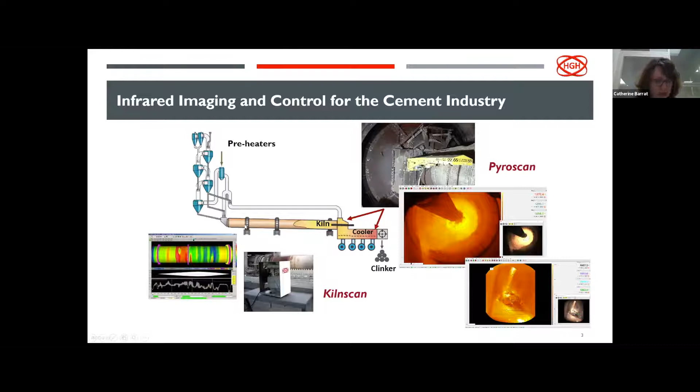What is the principle of the kiln shell scanner for rotary kiln shell temperature monitoring? A kiln shell scanner is a line scanner measuring the temperature over one line along the kiln shell. And as the kiln is rotating, we obtain a full temperature image of the kiln shell, taking into account that the scanning speed is 25 Hertz, meaning that this line scanner measures one line 25 times per second. So using the kiln rotation, we obtain a temperature map of the kiln shell.

The angle of sight of the scanner is at least 90 degrees up to 140 degrees. Using this method, we are able to see the temperature of the kiln shell. This allows the operators to make the maintenance easier because it detects hot spots and measures brick and coating thicknesses.

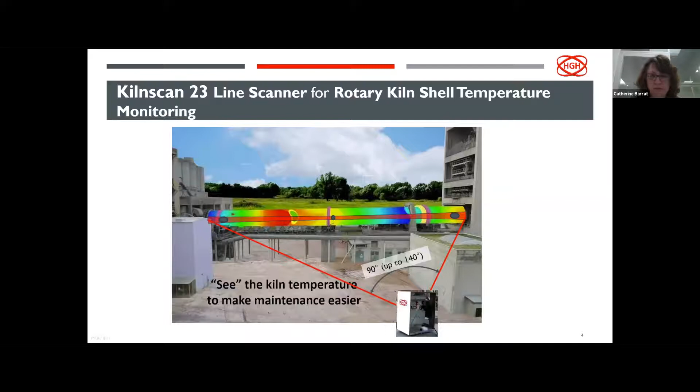The benefits of the Kilnscan 23 line scanner are listed here. It ensures a long-term kiln shell integrity by a 24-hour, 7 days a week, real-time surveillance with alarms on critical parameters, with accurate and reliable measurements on temperature, thanks to its high resolution and its accurate temperature measurement resolution.

It enables accurate maintenance scheduling through the monitoring of the evolution of the refractory status and the shell distortion, by anticipating failures with preventive action and by minimizing downtime and optimizing maintenance frequency. The system is easily taken up by maintenance operators through its user-friendly software interface with visual results and intuitive parameter settings, and it is easily integrated into the control room and plant DCS.

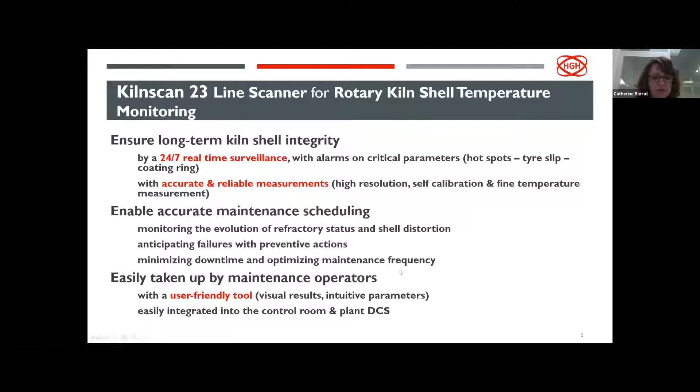Going through the numerous installations we did all over the world, we faced multiple imaging challenges due to complex plant configurations. Among these complex configurations, the most frequent cases are illustrated here. On the left, the case of very long kiln for wet process: how to cover such long kiln.

The case of kiln located inside a building with a short, limited free distance to locate the scanner, and, which is actually maybe the most frequent case of challenging configurations, the kiln masked by posts and supports all along the kiln shell system plant. So this presentation is going to show you that our Kilnscan system remains well adapted even in those complex configurations.

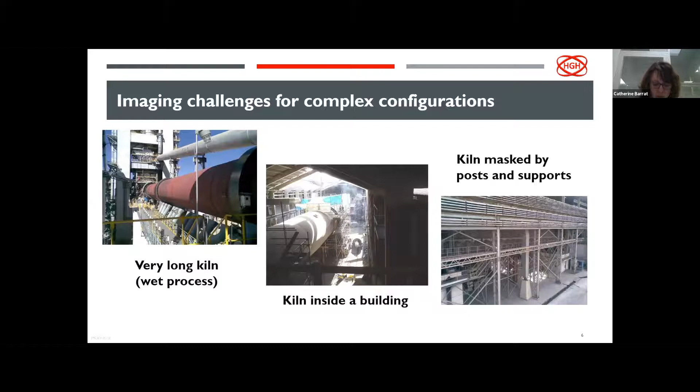The first configuration regards the long kilns configuration. So for the long kilns, we have the possibility to integrate into our system two scanners located side by side and aiming at distinct portions of the kiln shell with an overlap, of course, of about 3 to 4 meters to ensure seamless temperature measurement.

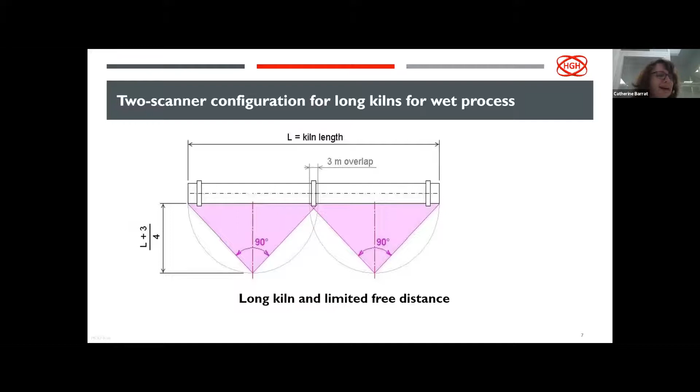In that case, the kiln scanners are located approximately at a distance of the length of the kiln divided by 4. And this is, for instance, a typical configuration with two 90-degree field of view line scanners. There is a picture of such an application here in this plant.

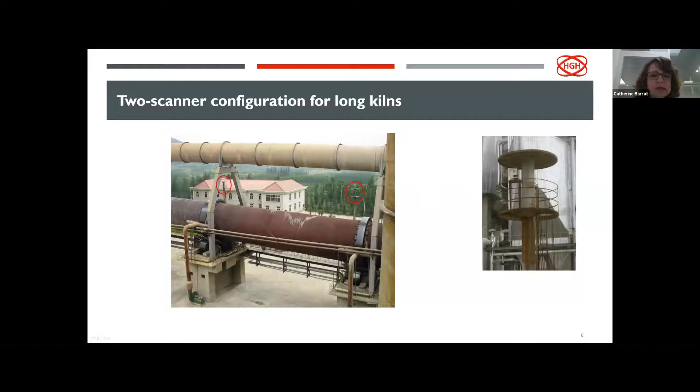The two scanners are located at the top of a mast and they each aim at two distinct portions of the kiln shell, and the two images from the kiln shells are combined to create the complete kiln shell temperature monitoring.

Another challenging case is when the free distance between the line scanner and the kiln shell is limited. In that case, we use our 140-degree field of view option so that the distance between the scanner and the kiln shell can be very short.

As an example, for a 60-meter length kiln inside a building with a distance to walls less than 4 meters, we can integrate three scanners side by side, each of the scanners aiming at 1/3 of the kiln shell. The case where such a configuration is installed is frequently when kilns are integrated into a building.

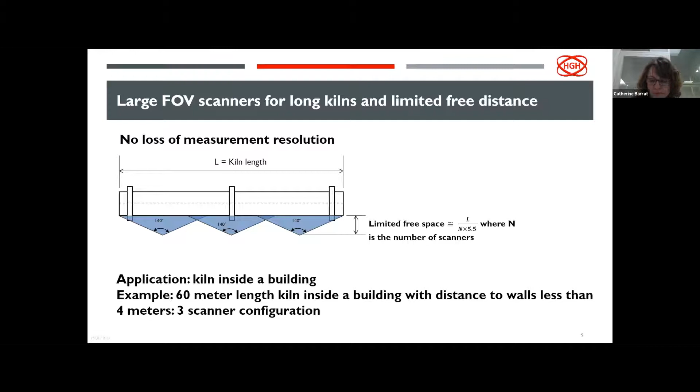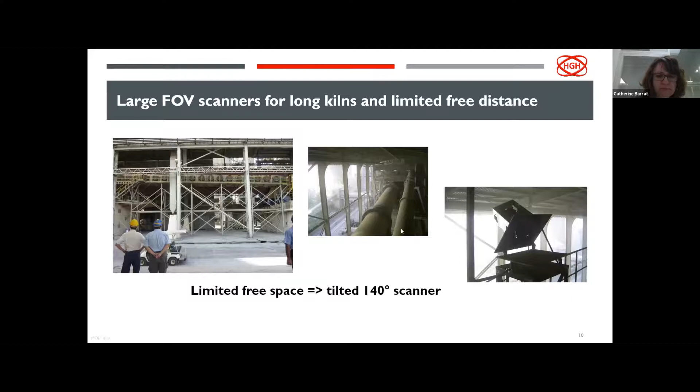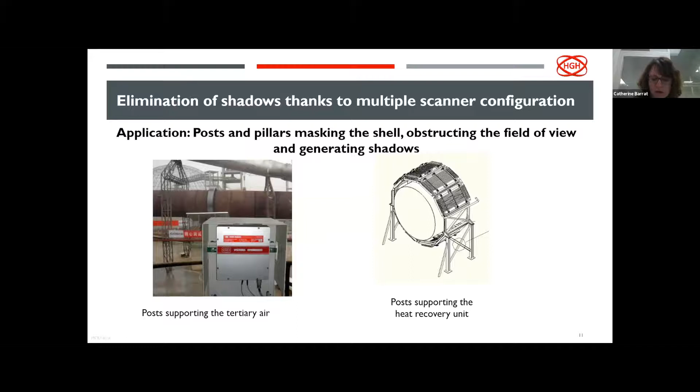The principle of shadow elimination uses the combination of the images of two scanners aiming toward the same portion of the kiln shell, as for instance in this plant where two scanners are located in the blue cabins here.

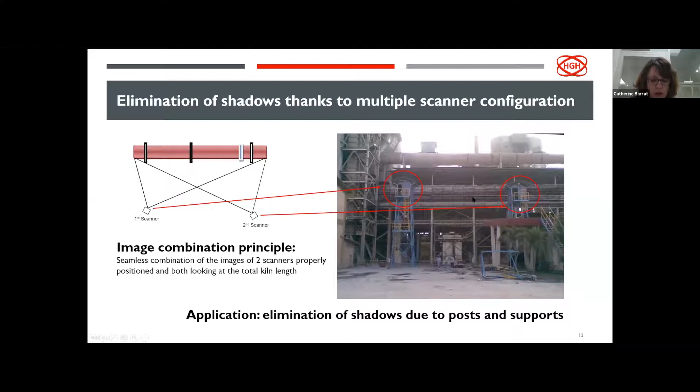So as an example of this combination, and in order to demonstrate the image combination principle, I'm going to talk about the configuration of the Tasek kiln shell in Malaysia, where we installed 3 line scanners. So this kiln shell requires 3 scanners, all of them having up to 140 degrees field of view.

The first one, with the yellow field of view here, measures the temperature of the portion of the kiln located inside the building. That's why the distance between this scanner and the kiln shell is only 4.3 meters. Scanners 2 and 3 aim toward the same portion of the shell, and their images are combined to eliminate shadows. The example of this pillar, for instance, easily explains the method of shadow elimination.

This portion of the kiln shell here is masked by the post here for scanner number 3, while scanner number 2 easily aims toward this portion of the kiln shell. So for this portion of the kiln shell, our system will take into account the data coming from scanner number 2.

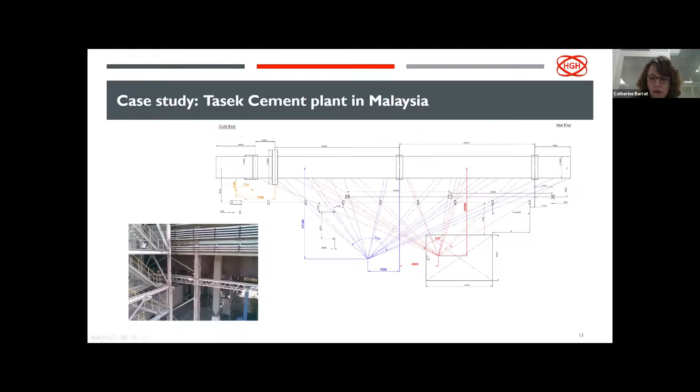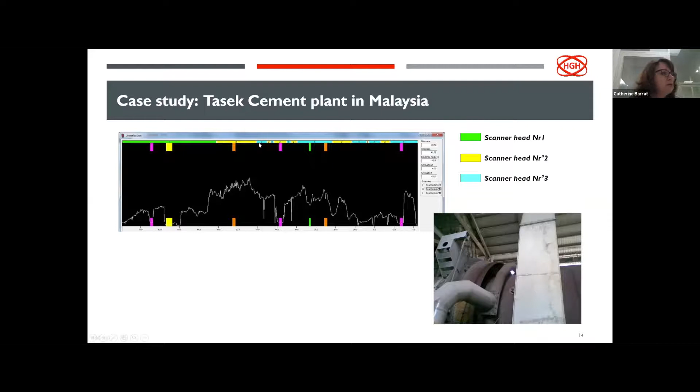Here are the results on the display. So the first part of the kiln shell is covered by scanner number 1, shown in green here, while the second part of the kiln shell is a mixture of data coming from scanner head number 2 and scanner number 3, depending on the location of the posts and pillars along the kiln shell. And thus we obtain the recombined thermal image for this kiln shell.

And maybe you did not pay attention, but the junction between scanner number 1 and scanner number 2, somewhere here, is actually located on the thermal image here, and we can't see any difference. The signals and the measurements are synchronized, harmonized, and rephased to provide a single seamless thermal image of the shell.

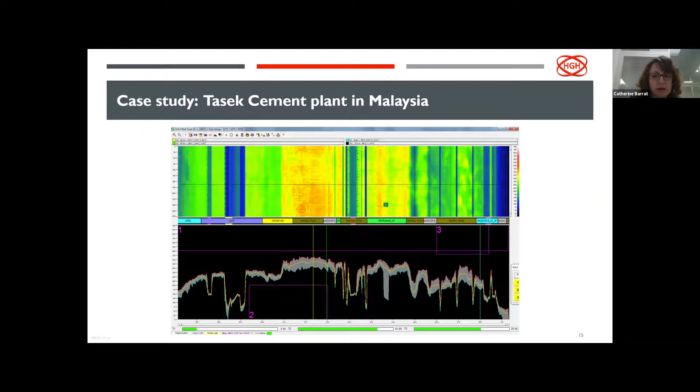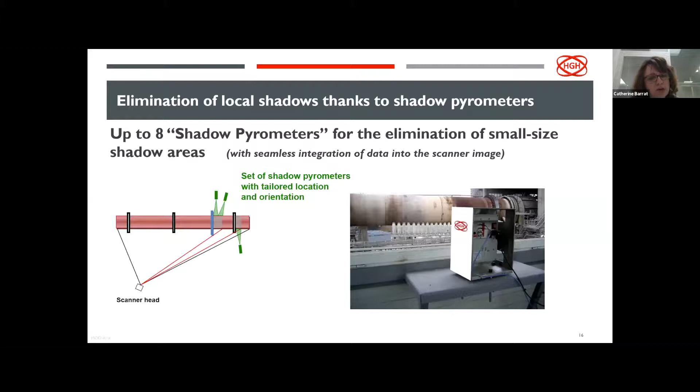Last method of shadows elimination. Whenever there remain small areas which cannot be seen by the scanner head, plugging spot pyrometers into the system allows us to monitor the temperature in these small shadow areas. So in that case, we can integrate up to 8 shadow pyrometers for the elimination of small size shadow areas, once again with seamless integration of data into the scanner image.

So the Kilnscan system is a flexible solution, having met many challenges over the years. Whatever the kiln configuration, if it is for a new kiln or a revamping system, there is a Kilnscan solution, thanks to the multiple scanner configuration, well adapted for long kilns, thanks to our unique 140-degree extended scan angle, helping us to cover the full shell even in a building without any loss of resolution, thanks to the image fusion capability for complex shadows elimination, and thanks to the complementary pyrometers for punctual shadows removal.

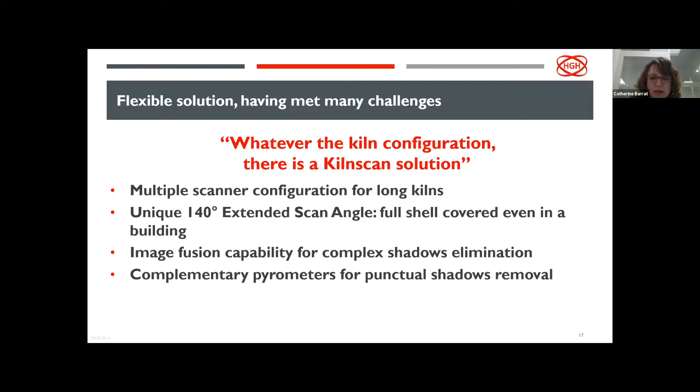Thank you very much, Catherine. That's very, very kind of you, and an excellent presentation on another invaluable piece of technology for monitoring the kiln shell, and for explaining the shadow elimination principle. It's possible to cover, like you said, any kind of kiln length, regardless of the obstructions around it. And I think that's really important to understand. And given that there's probably people from over 100 countries logging into this call with all kinds of kiln configurations, I think you've covered all their requirements.

There's a couple of questions. You're able to cover the whole length of a kiln, and you're able to deal with the obstructions. One question is, probably not measuring directly underneath the tire, but is there a way of using the information that you have for the whole kiln profile to understand what might be happening to the heat profile underneath the tire? That's obviously not in the view of the Kilnscan, but it's important because people need to know what's happening underneath. Is there anything that you can do in that respect?